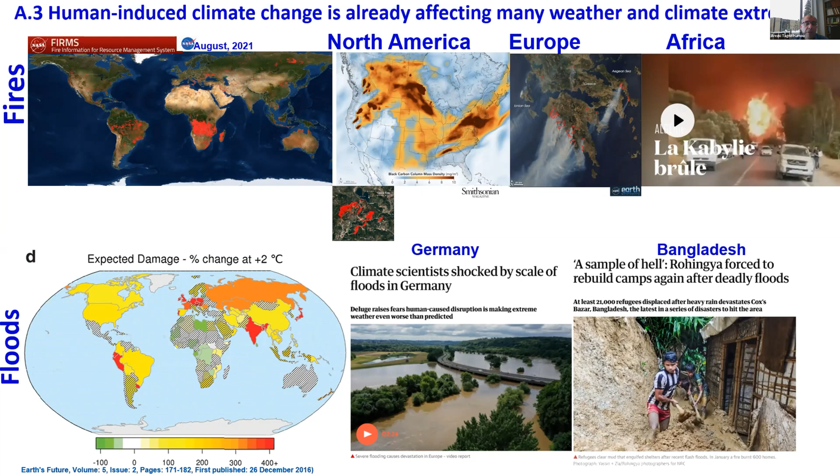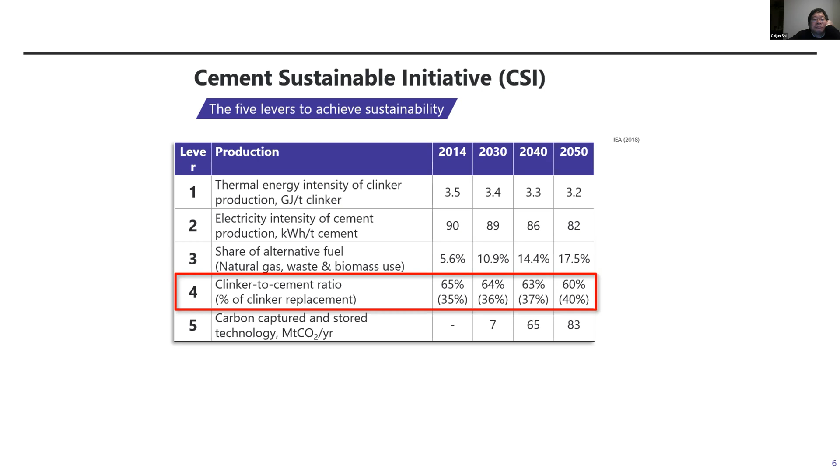Generally it's about clinker replacement, so I will focus on that, especially the alternative materials we can use here. You know this picture, I like it, from Sobolev and Sanchez, showing the different sizes of the particles.

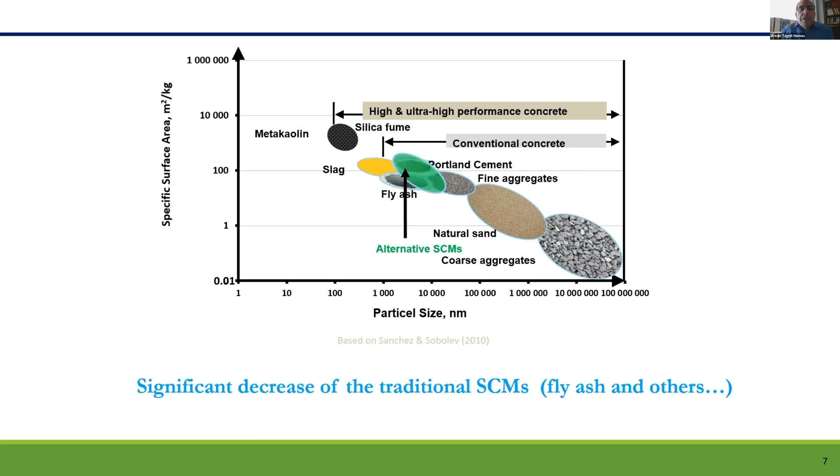We would like to have alternative SCMs in these concrete mixtures, and we know there is a significant decrease of the traditional SCMs, as Doug presented very well. I think harvested fly ash is also one of the promising materials.

If you look at the potential solutions, other than business as usual, we have different materials that can be used as a clinker replacement or cement replacement. Here I present glass powder, mine waste, calcined clays, bio-based SCMs, and alkali-activated low-grade fly ash and slag.

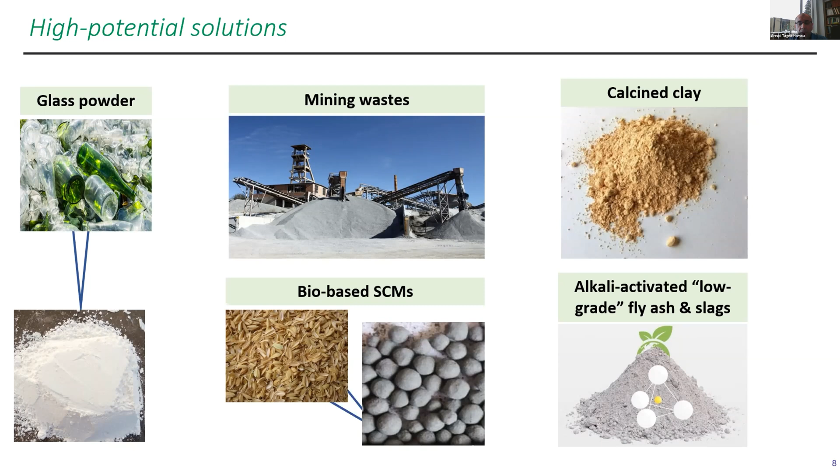So let's start with the glass powder. I've given many presentations about glass. A lot of people know about our work on the SAQ chair on valorization of glass in materials. This chair has been financed for a very long term, from 2004 until now. I say that just to show how long it takes to develop a new material.

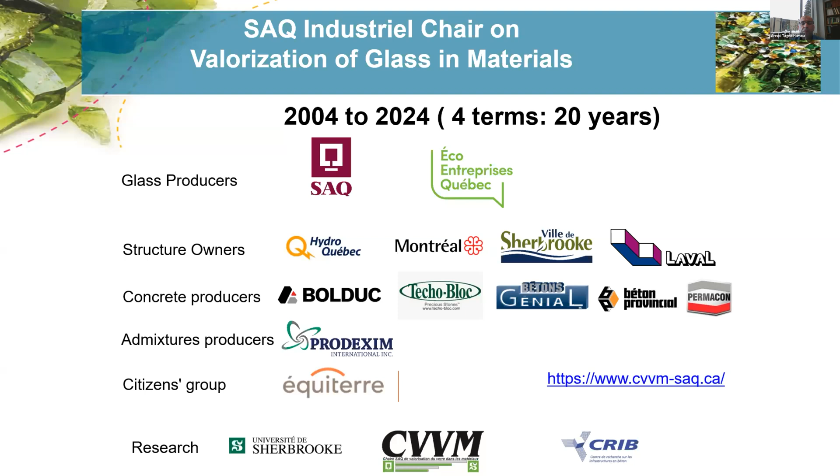So we have glass producers, structural owners, concrete producers, admixture producers, and even citizen groups involved. If you want more detail about the chair, you can go to this website and find a lot of information, for instance the list of publications and technology transfers which were done.

I just want to show that there is a huge amount of work which needs to be done before developing a material. You have to go, as we did in the chair, from fundamental research, from nano to macro scales.

Some of those materials included other materials in the mixture, like what Professor Shah said this morning. In concrete technology, we had the fresh state rheology, mechanical performance, durability. You have to go all through this. We tested different types of concretes: usual concrete, high performance, SCC, RCC, ultra high performance concrete, strain hardening concrete.

And alkali activated concrete. Then you have to do the life cycle analysis to show that this material is sustainable. And then you have to go to the technology transfer. So we did a technology transfer with the town of Montreal, town of Laval, town of Quebec, Sherbrooke, Hydro-Quebec. Many students and postdocs worked on this project, like Ahmad and Nancy here, and others, so they are online, I think.

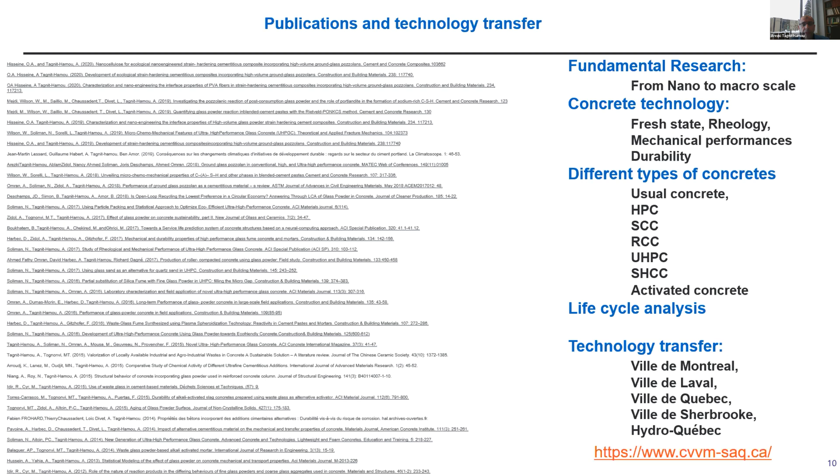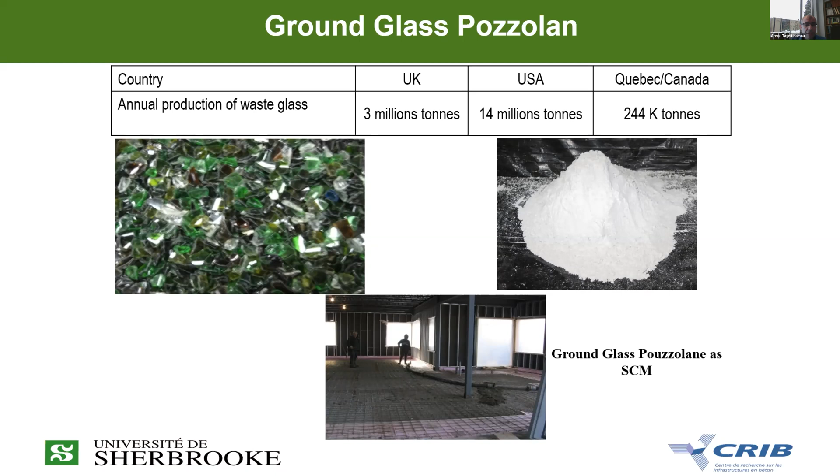So just a brief presentation of the ground glass pozzolan. Well, what we did, I will fly through what we did. So the ground glass pozzolan is really very important, especially in the Quebec area. We had many problems with glass, and also in New York State, for instance, and in many places in the US.

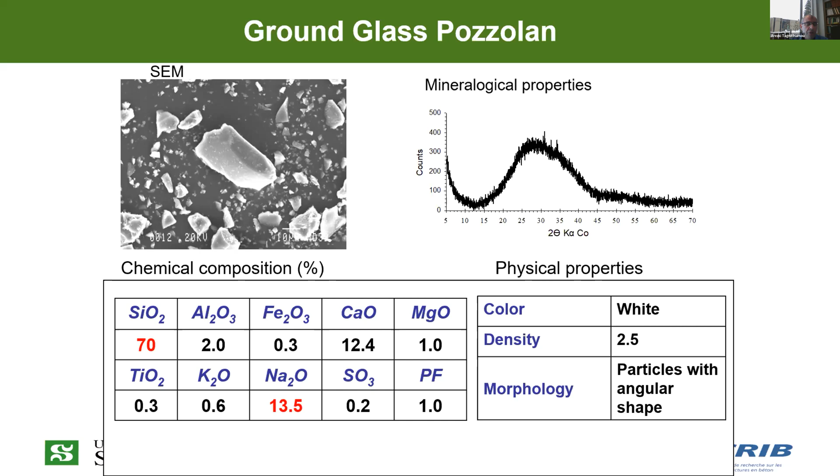So ground glass pozzolan is an amorphous material. You can see here by this XRD. It is rich in silica oxides, also around 70%. But of course, there are alkalis in one type. The other type is free of alkali, but the major amount has high alkali content.

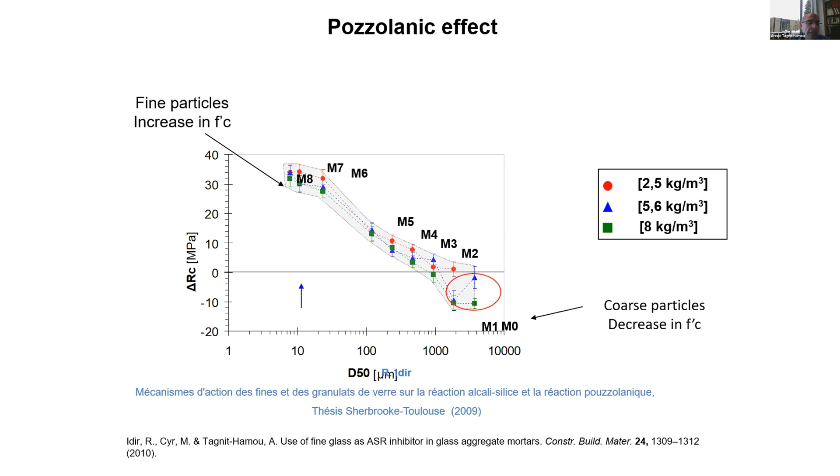Of course, because of the reactivity of this material, don't use it when it's very coarse, unless you use special mitigation, because when it's coarse, it will create cracks, and because you have ASR, which can be formed here. So the finer the material, the higher the reactivity, then you can gain a lot.

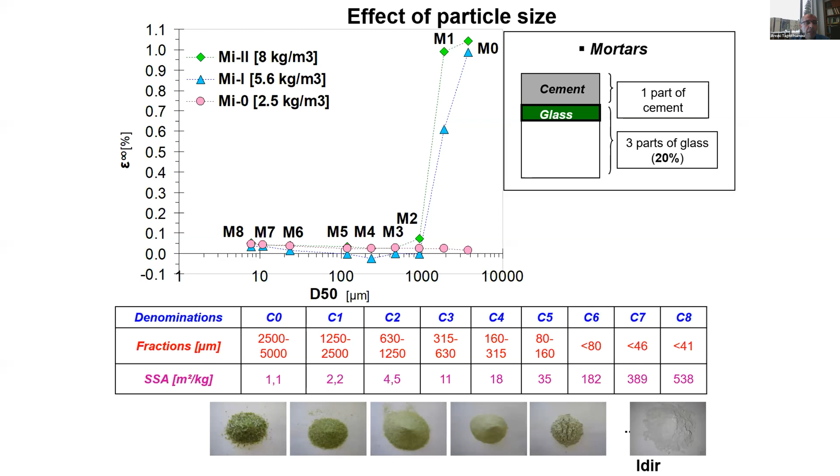But when you look at the expansion, if it's very fine, as you can see here, then you have mainly the CSH or C-A-S-H formation. But if your material is too coarse, the threshold here is around 1 millimeter, but mainly we use it at 600 and 800 micron. Higher than that, you have a threshold and a huge expansion because it's reactive. And you go, at this threshold, from CSH to alkali rich gel.

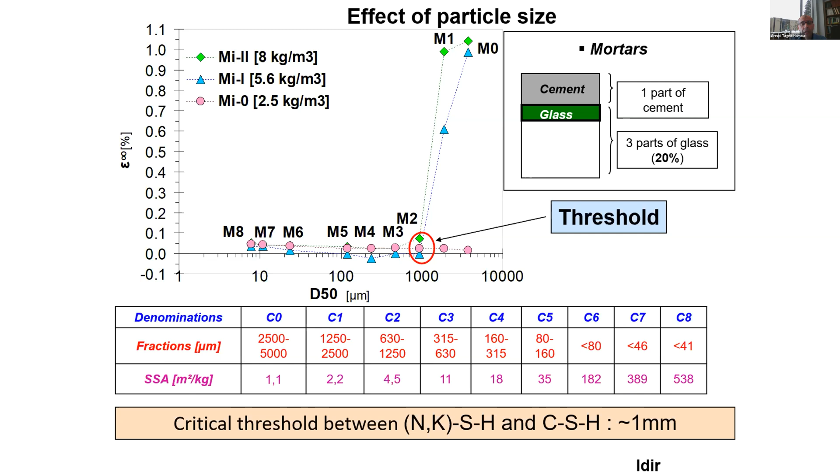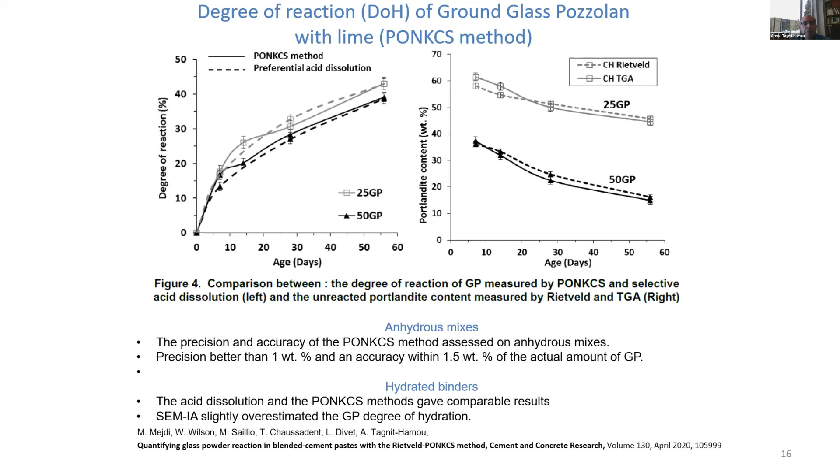Now, for the degree of hydration, of course, we use the ASTM method, and we also use lime. But here we use the PONKCS method by XRD of amorphous material, and it works very well. It works very well for glass. Maybe it doesn't work for some other pozzolanic materials, but for glass, we definitely can use the PONKCS method, and it gives excellent results. We can see here that at 50 or 25% of replacement, we have very good reactivity, and you can go to these papers here in Cement and Concrete Research. We published all this.

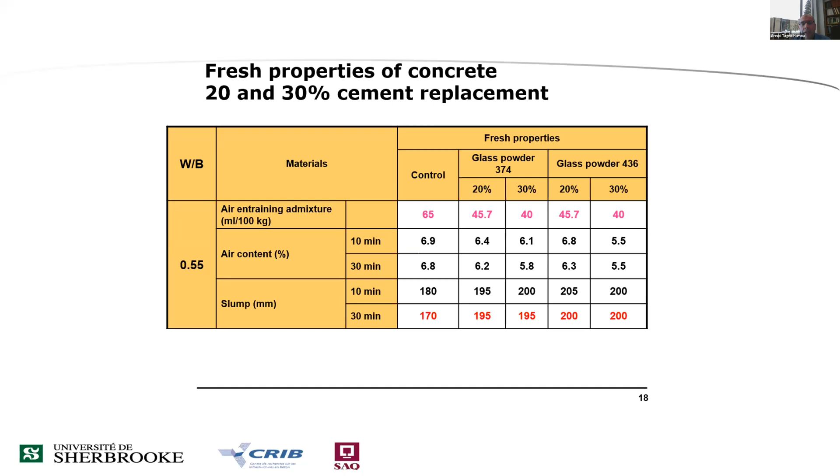The mechanical performance of this glass in a conventional concrete is presented here. So we worked with two finenesses here, and you can compare with the control. We can see that the rheology is not really affected, or the slump is not really affected, and we can have a good slump with glass because its absorption is almost zero. But we have two finenesses here, 20 to 30% replacement. So we can have high compressive strength, very good compressive strength, if you give time to the glass to react. Of course, it's like other SCMs, slow in reaction.

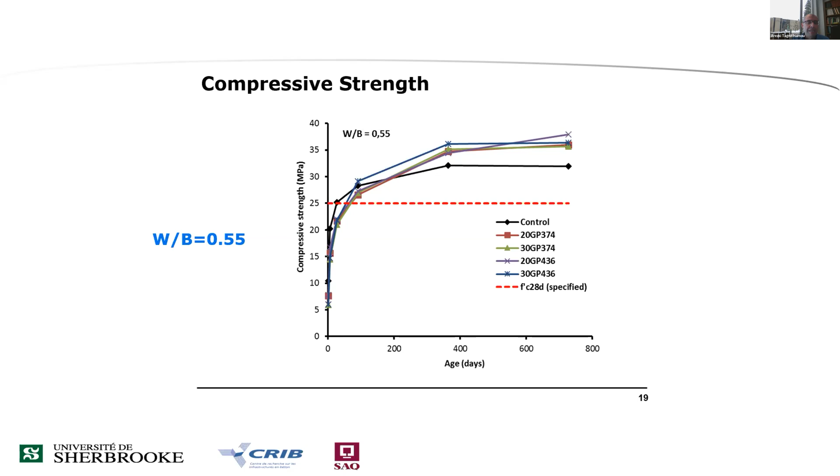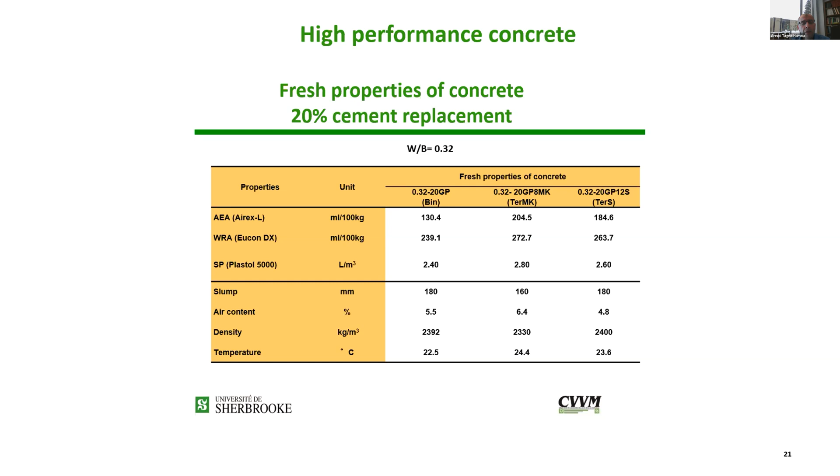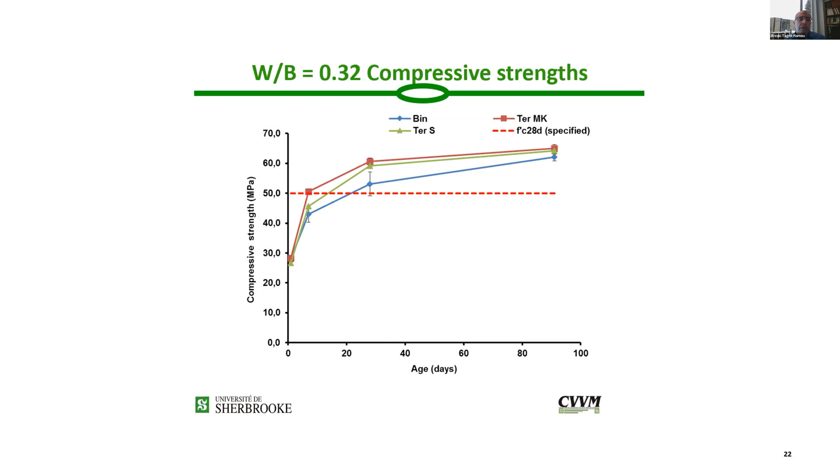In a high performance concrete, we did a lot of work here, and this work was done mainly by Zidal, using 20% cement replacement. We can see here that the compressive strength is good, and it's increased, even in binary or ternary mixtures. For the durability, of course, freeze and thaw depends on your durability factor.

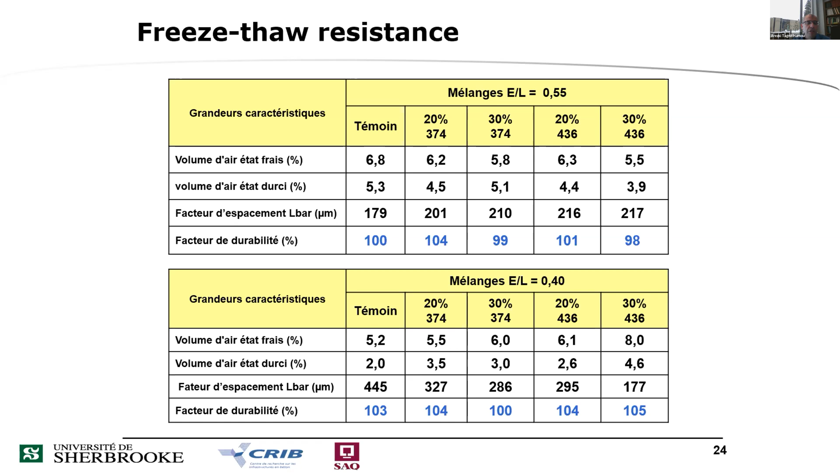If you have enough air in your concrete, the freeze and thaw resistance should be good. But that's not the case for scaling resistance.

Even if you have some air, you have a problem when you add mineral admixtures like fly ash or glass. You can see that you're limited to a given percentage of glass for cement replacement. At 20%, we are under the limit, but if we go higher, then we have some problem.

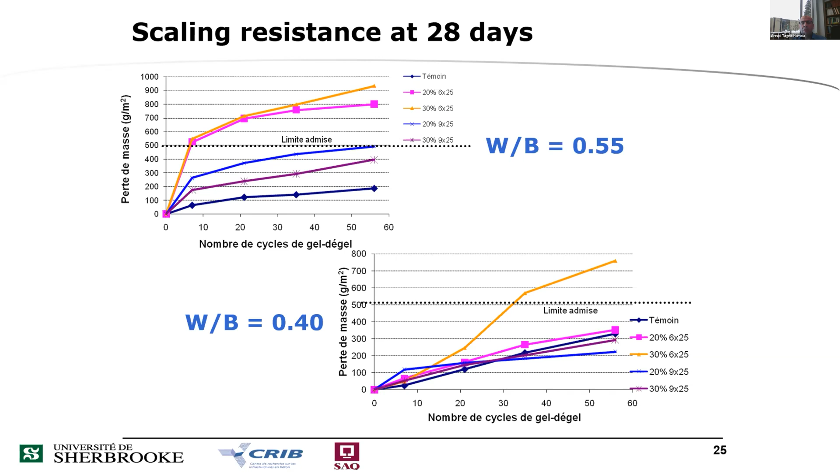However, here we went with 30%, but we had field testing for many years now in Montreal, and it's amazing, but this concrete doesn't show a difference in scaling compared to the others. But we know about this.

The chloride ion diffusion is amazing. We can see here how the permeability is decreasing. When we add 20 or 30% of glass powder, the permeability is significantly decreasing in this case.

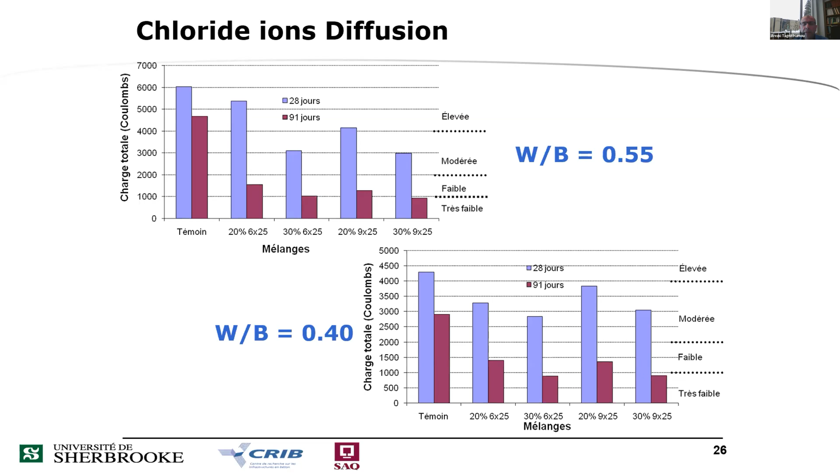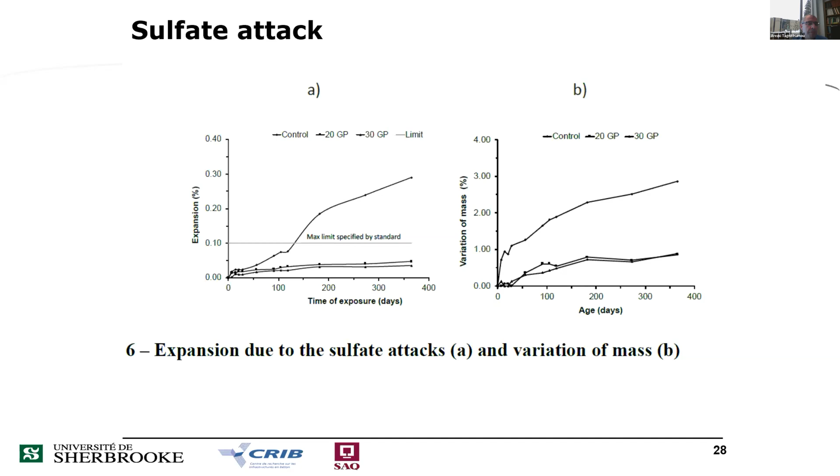Very good resistance to sulfate attack, as you can see here, with 20 to 30% of glass powder or glass pozzolan. We don't have any expansion due to sulfate attack.

Now, yes, ASR is another story. Many people are asking about ASR because we have 13% or more, and now the new standard in Canada allows up to 15% of alkali, because this is the case with glass.

But you can see here that when we add from 10 to 30% of glass pozzolan, the expansion is decreasing, and we worked with a very reactive material, Spratt. Actually, we are working with an average reactive or borderline reactive aggregate. This work was done by Isabelle Fily-Paré together with Benoît Fournier and Josée Duchesne from Laval.

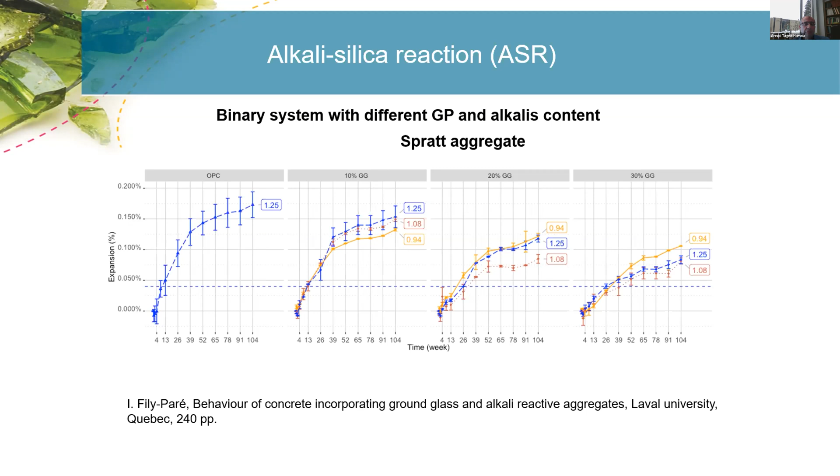But it's important to say that even if it's decreasing, there isn't really mitigation happening, unless you go to a ternary blend. So at this binary blend ratio that we worked with, it's very difficult to say that it is mitigating.

Of course, I'm speaking about the high alkali glass powder here, not the low alkali.

We did a lot of concretes with Isabelle, and the work is ongoing with another student. We found that some ternary blends are working very well with metakaolin or fly ash, at 10%, 20%, and also 30%. We have brackets here where we can see that we are under the limit of expansion. So we are now working with a new student to test different types of aggregates.

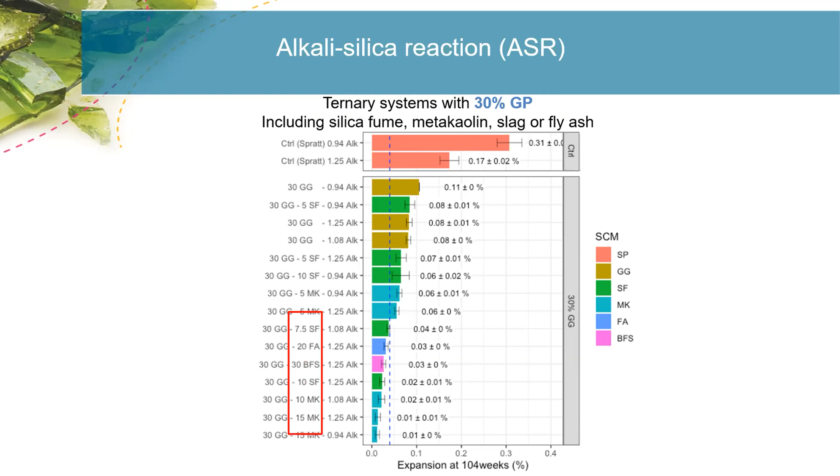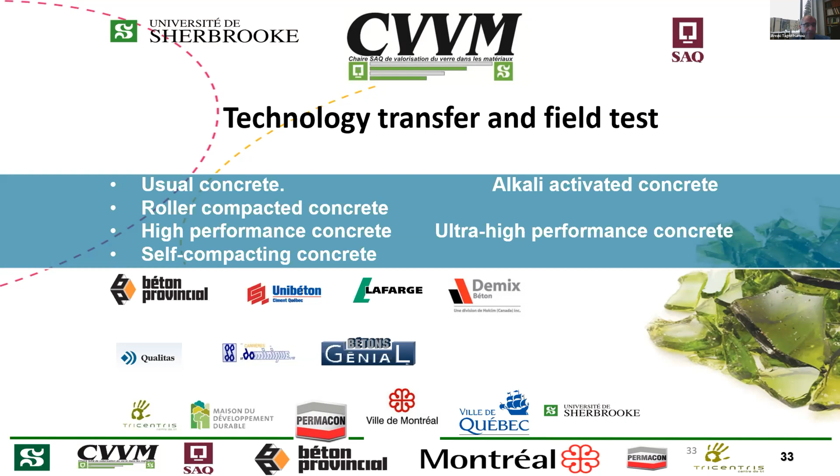The technology transfer and field testing of this material involved a huge program. We tested the glass pozzolan in different places, working with usual concrete, roller compacted, high performance, self-compacting, alkali activated, and ultra high performance concrete. All these companies you can see here used this material at a given time.

We did a technology transfer to a company who is now producing this glass powder. We have more than 50 projects now with glass pozzolan in Canada that we need to update. We did a lot of work with the Société des Alcools, who is financing and is a principal sponsor of that chair, but also with the town of Montreal.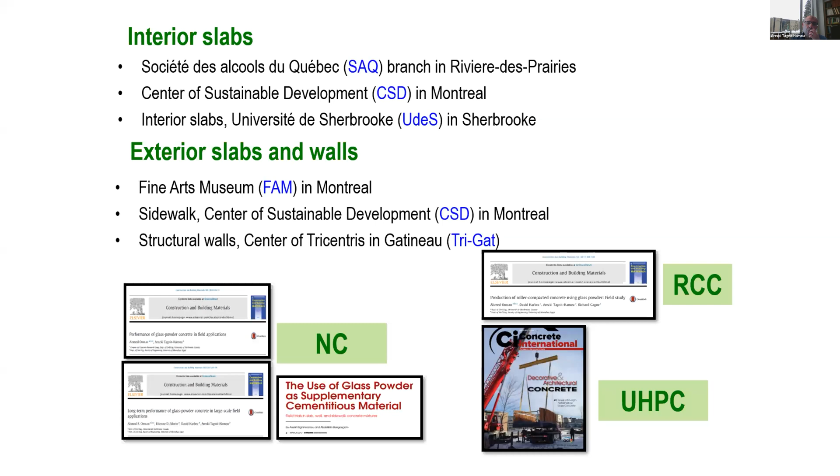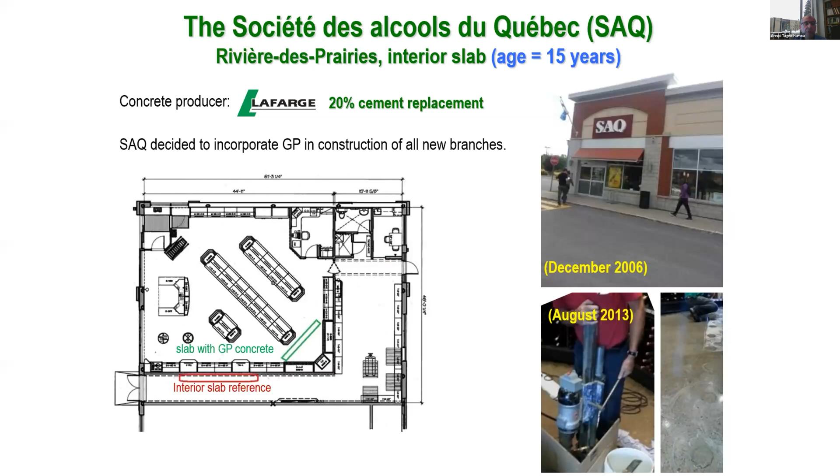We did a huge program, and here you can see many work done a long time ago. So now we did coring, and many times it's time to recore again, but all these results are published in different papers you can find on the website.

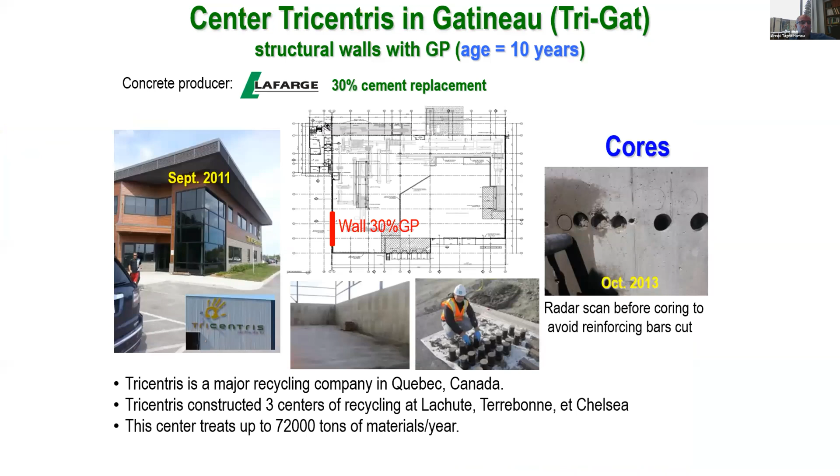We did very good work, for instance, with the Musée des Beaux-Arts in Montreal, who wanted a sustainable material with a matching color to their museum. You can see the sidewalk here, retaining walls, and slabs at the University of Sherbrooke also, where we used it when we constructed the laboratory.

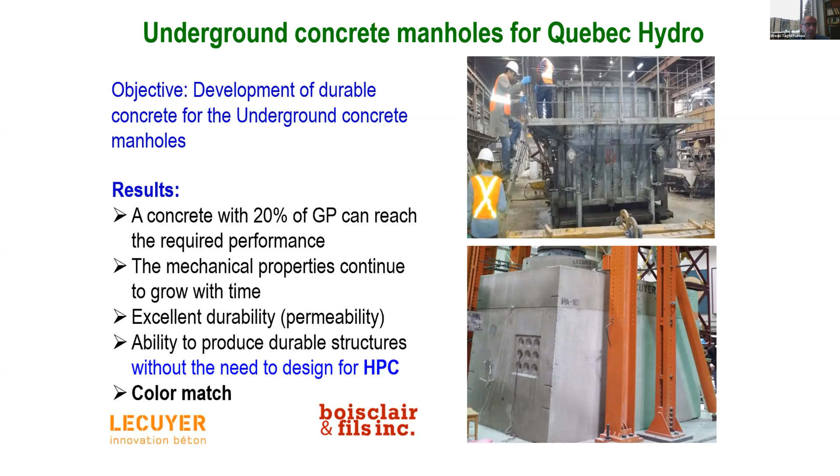The manholes of Hydro-Québec are now more and more designed with glass powder, up to 20%, and they are actually testing the real structures.

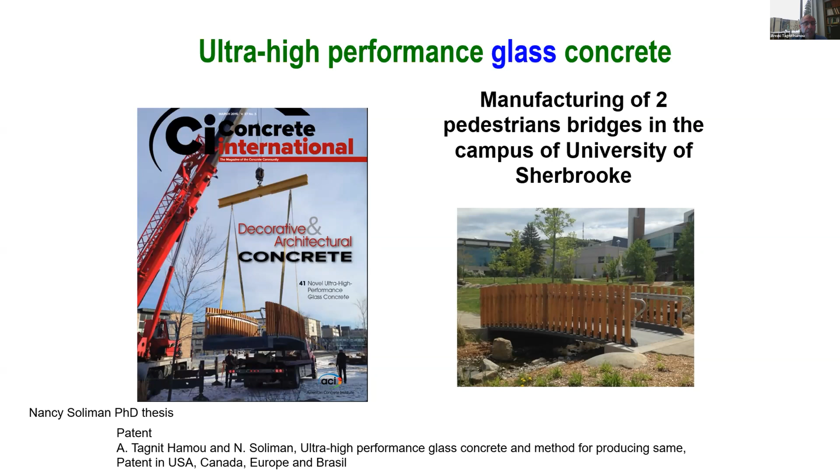We also developed ultra high performance glass concrete, and we have a patent thanks to the work done by Nancy on her PhD thesis. This is now owned by a big company.

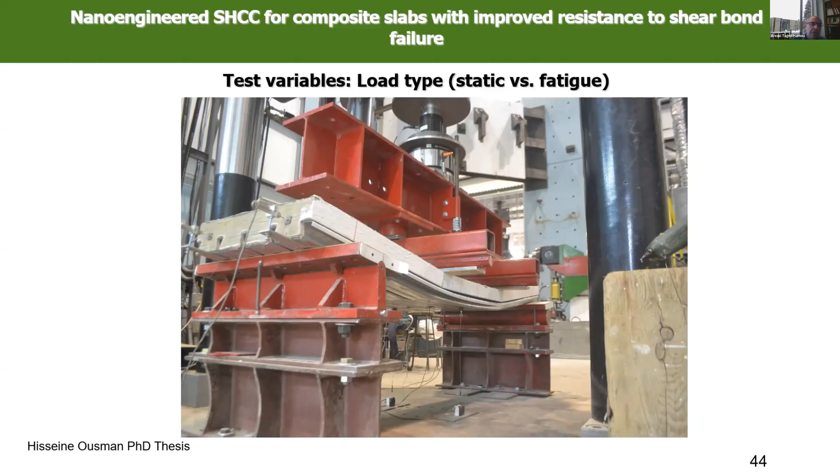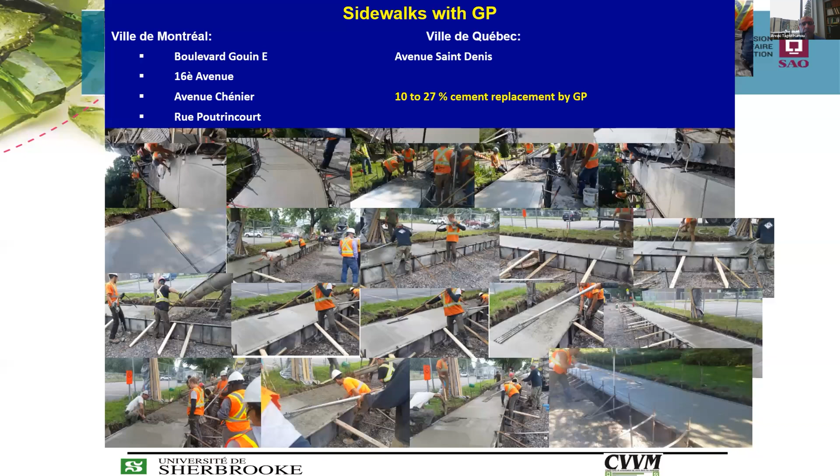We also did SHCC, strain-hardening cementitious composite. You can see here the materials are followed by our students everywhere, and in all the projects our technicians and students are there taking samples, and all those results are in published papers.

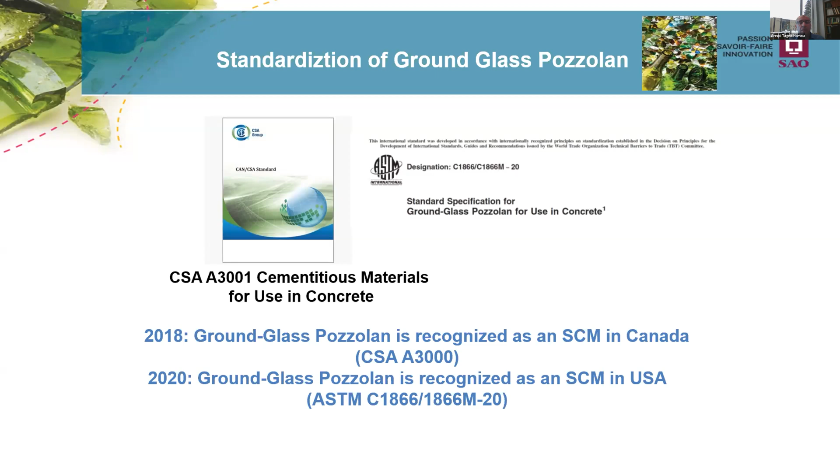So the ground glass pozzolan standardization, and as Doug said this morning, the ground glass pozzolan is recognized as an SCM in Canada, but also in ASTM. It's a long way to arrive to this success here, and it's very important to know that it's not easy to go from the laboratory to the market.

So I'll just take you to another type of materials. We are doing this, the mining waste from the mines. And if you don't know that, I'm sure you know that in Canada, mining is very, very important.

And in these last years, the Canadian government is very concentrated on the critical minerals, like copper, but also lithium for cars, magnesium, and many others. And the approach they are doing now is more of a chemical treatment of the ores or the minerals.

And this is generating a huge amount of residues from the tailing. So they are doing some tailing treatment, and this is a huge amount of those potentially reactive materials. I want to show you just quickly two.

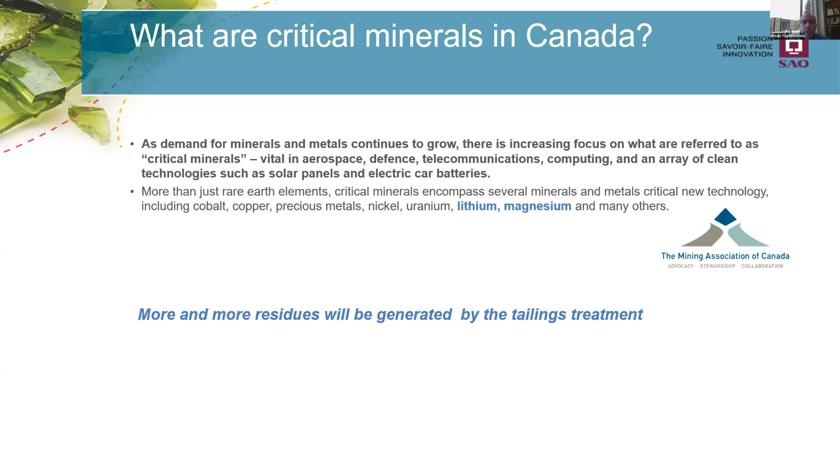One is close to Sherbrooke, and you all heard about the 800 million tons of asbestos when the quarry was closed. We end up with mountains of those materials, and now there are some companies who are doing a great job treating the residues, by extracting the magnesium from the serpentine.

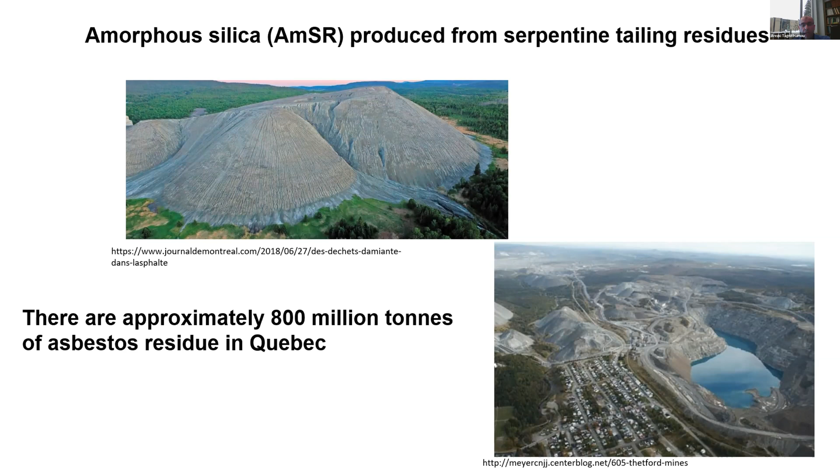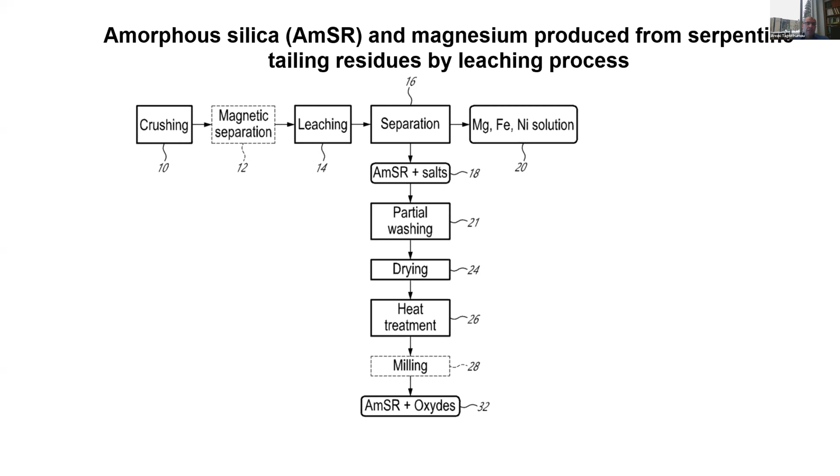But when they extract the magnesium, they end up with amorphous residue. So they are doing a sort of leaching process, and this will show you. This is the separation. They produce magnesium and other oxides, but also they produce silica, amorphous and rich. So you can see here the composition of the material.

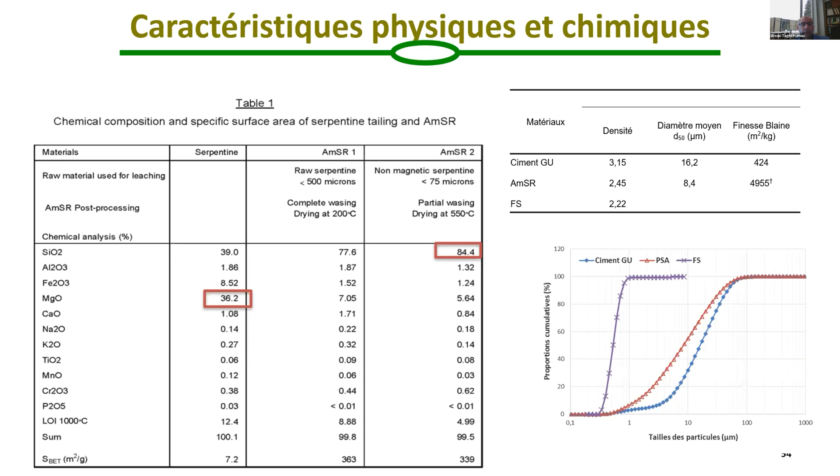This is the serpentine. But when it's concentrated, you can end up with around 70 to 80% of SiO2. And this is all amorphous, and it's also verified by the process.

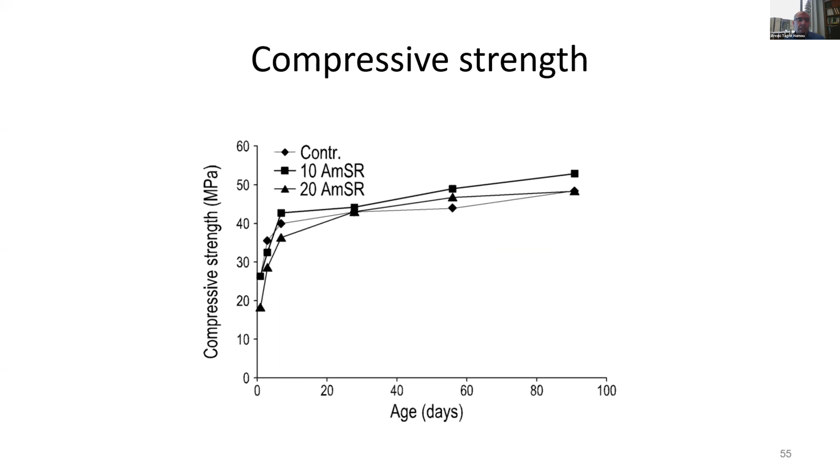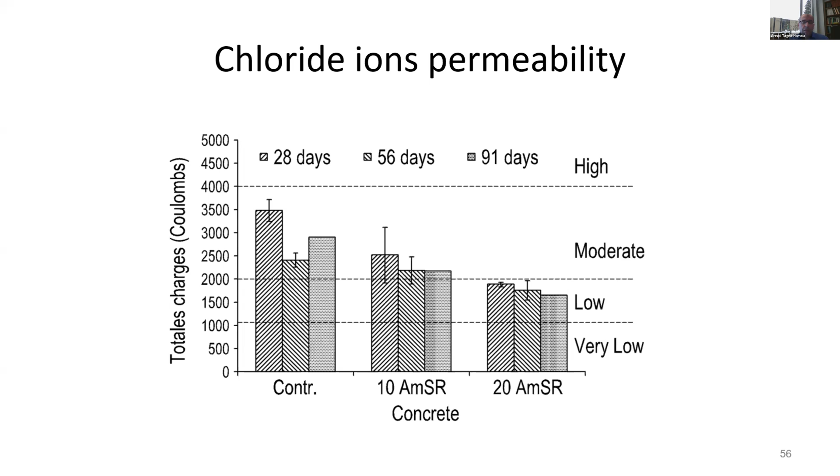The compressive strength is very good. For now, we are doing many other testings, and we are upgrading the material. You can see that the permeability is also very, very good. And this can create a huge amount of this material.

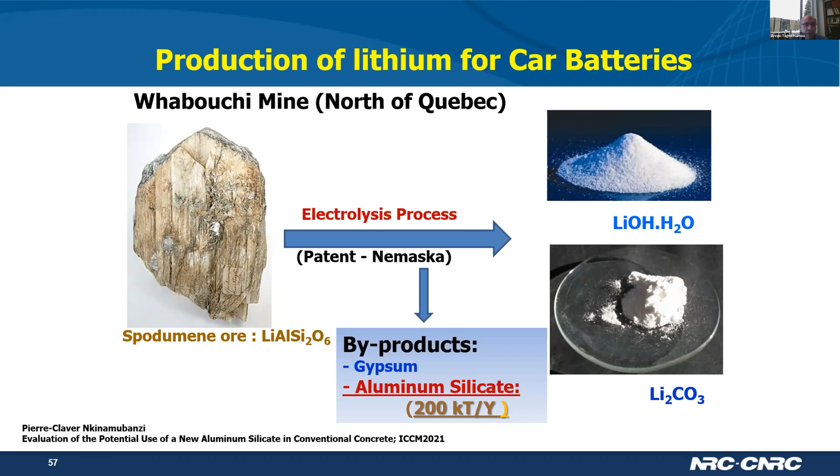And you can see here also the byproduct. It's a sort of aluminosilicate in that case, where you have SiO2 but aluminum also. And this will also be a huge amount of this material.

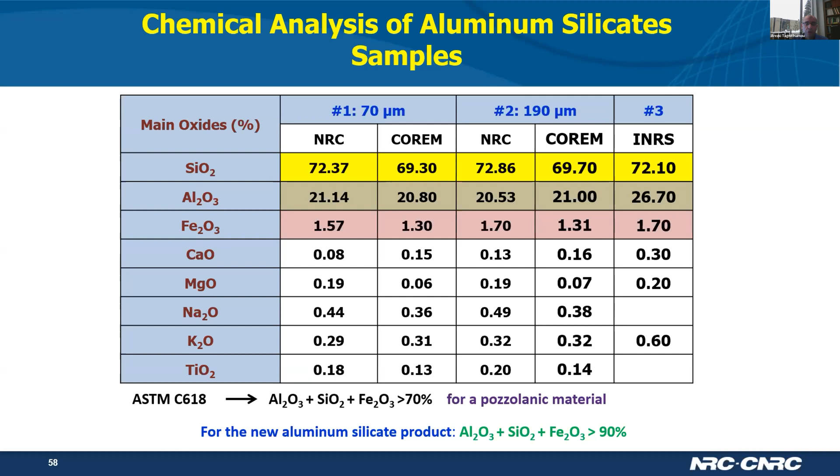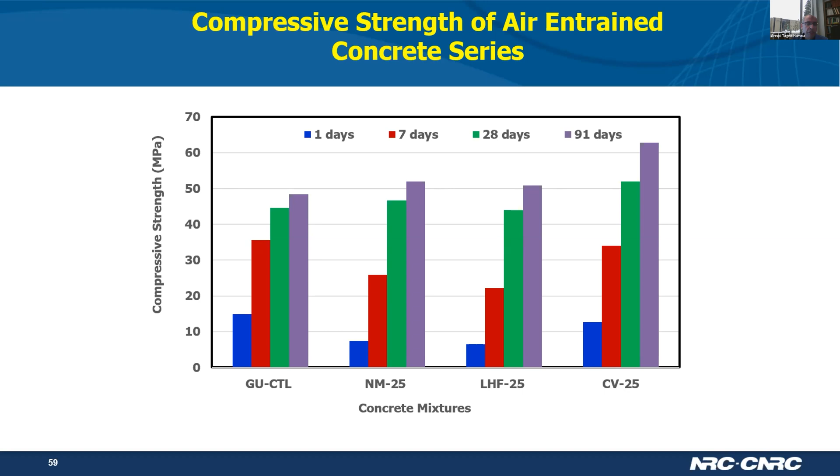And you can see here that this is the material. You can see the compressive strength is very good, and it's increasing until 91 days. Last but not least is the calcined clay.

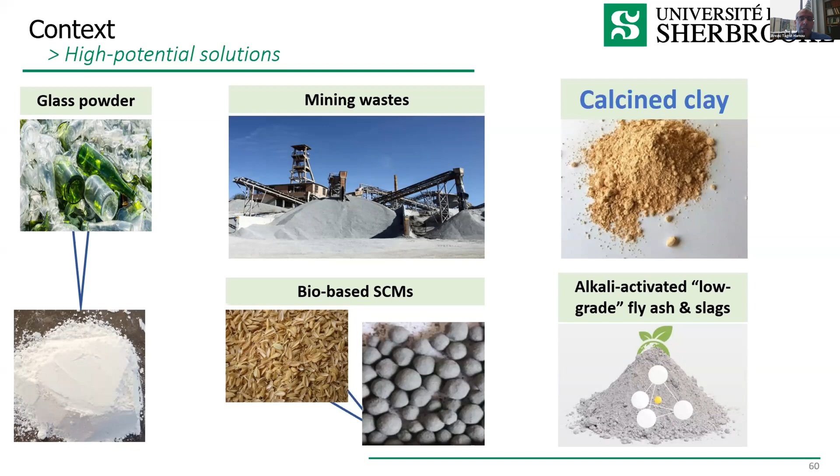I think Karen did an excellent presentation this morning, and you all know about LC3, but here we are taking the same approach, but trying to look at the residues. So this picture here is coming from Morocco, where we are doing a big project with the phosphate industry there.

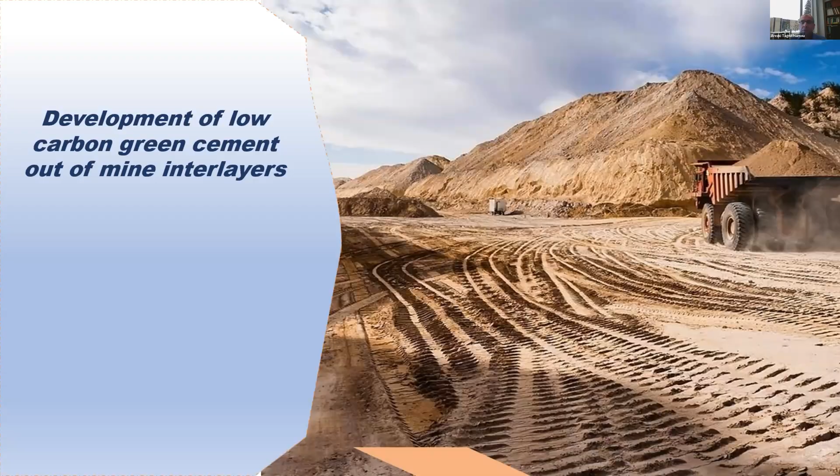They have a lot of mining interlayers. When they extract the phosphate, they end up with a huge amount of different materials, so that they have a sort of clays, dolomitic limestone, and marls.

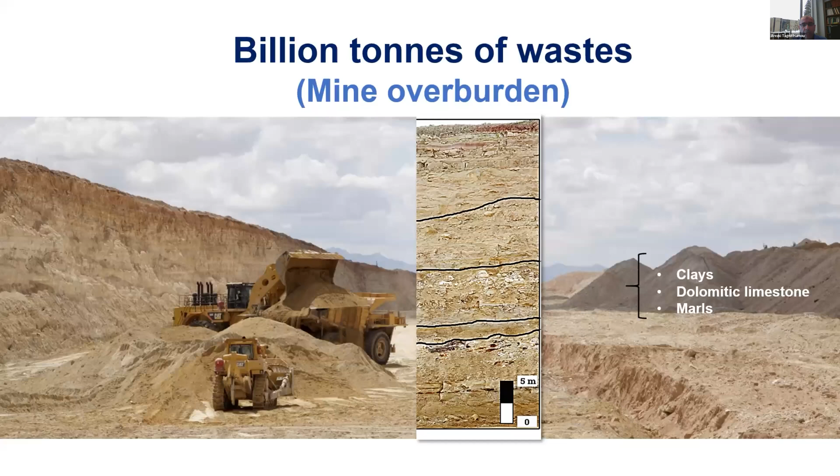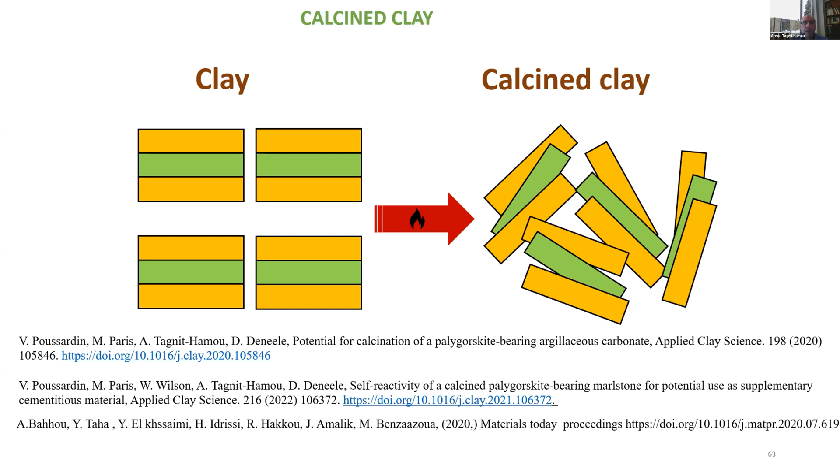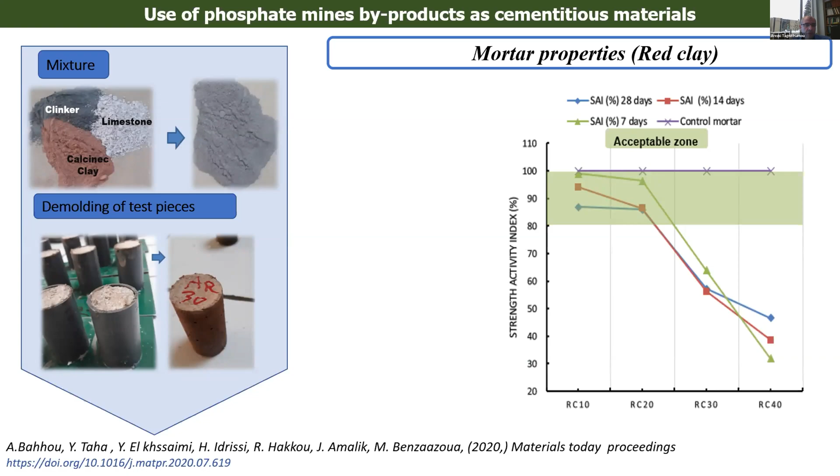We spoke this morning about North America, and this is the calcined clay that we found in the US, and the amounts are also very large, but this is what we call Palygorskite. So it's not kaolin, but it has very good reactivity, as you can see by the pozzolanic activity test here.

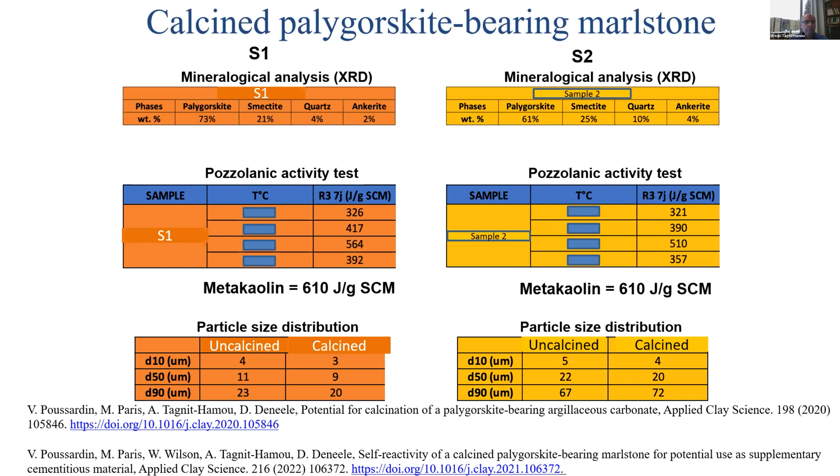Different types have different reactions, but as you can see, the one which is reacting more has more Palygorskite than the other. So when they are calcined, they show very good performance, as shown here in the index and resistivity measurements, which are very good.

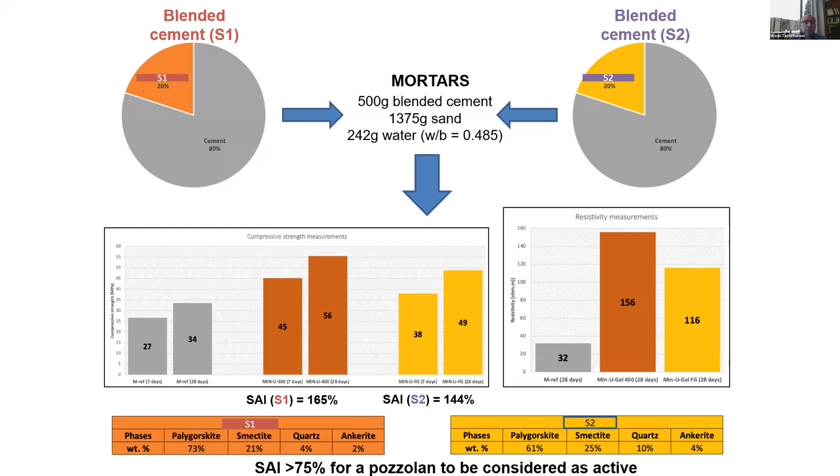So we are actually working in mortars, but the next step is to work in concrete.

So I end with some general comments. As the Climate Change 2021 report said, there is no time to lose. But I ask myself why it's so slow to develop these materials. I think all of us forgot that the material has to go to the market, and we developed many technologies and materials.

The concrete community, the scientific community, is very productive in different types of technology and materials, but alone we can't do really a lot.

We have to include social acceptability, industry change, and public policy. But this we generally leave to industry, and as researchers we have to include our colleagues from management, public policy, and also from sustainability and economics.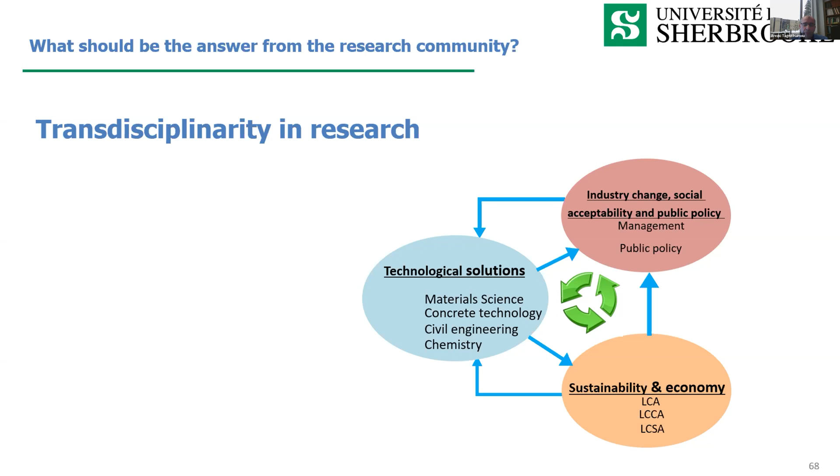This only works if we engage in transdisciplinary research. If we mix together, not just giving the job to someone to calculate the economic approach or give you the management, but work together as a team, then what I call GMR can happen: we don't just go to the TRL, the technology readiness level. That's not enough. We have to go to green market ready materials and technology. So we need to work together.

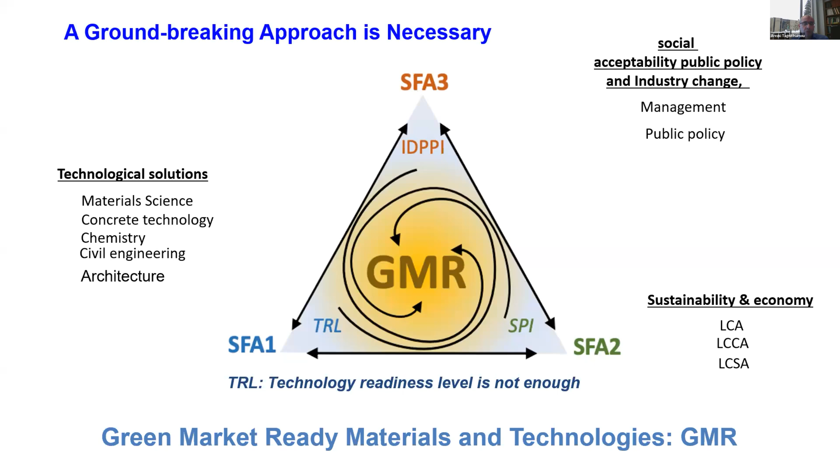Academically, we always say the concrete industry is in silos, but I think we as researchers are also in silos, so we have to integrate and converge expertise to work together. We need a transdisciplinary strategy, not just working alone.

We have to speed up the integration and implementation of top-notch CO2 reduction materials and technology, and give access to world-class research infrastructure across national and international boundaries. And of course, give a chance to a large pool of bright students who will become future leaders.

Thank you very much.

Thank you, Professor Arezki. It's a very interesting presentation.

We have a couple of questions coming from Amr. He asks: does all types of glass have the same behavior? For instance, bottle-colored glass similar to usual glass?